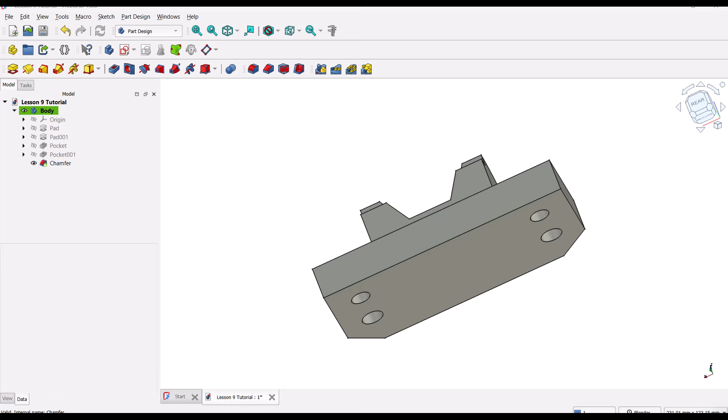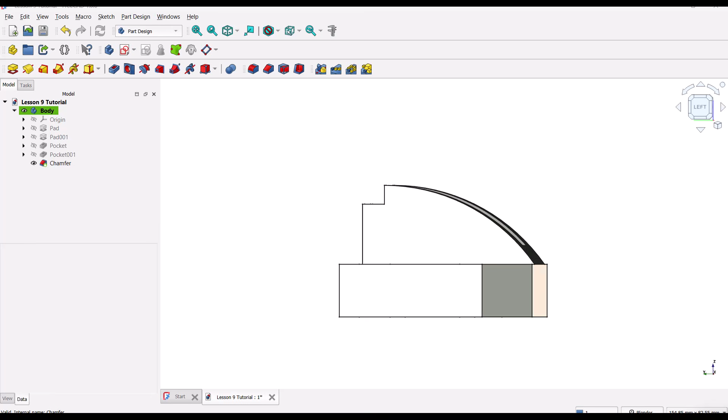In this FreeCAD beginner tutorial series, we model standard academic drawings. These are designed to help you understand how to simplify complex objects, deduce hidden dimensions, and read technical drawings. Once you finish this series, you'll be able to break down complex objects, model them easily, and troubleshoot typical FreeCAD issues.

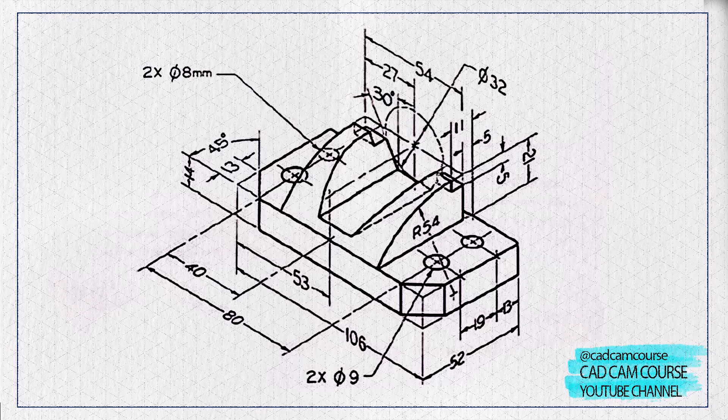In today's FreeCAD beginner video, we'll model this part called the locating finger using the Part Design Workbench. This is one of the most important parts in academic CAD training. It helps you learn the basics of 3D modeling and, more importantly, how to deduce hidden dimensions from an isometric drawing. I'll be using this reference drawing to grab all the dimensions for this object.

If you have followed my previous videos, you will know that first we will break down the complex solid into simple and easy steps. In this video, I've broken this process into 5 easy steps, and I'll also include a follow-along PDF in the description if you'd like to download it.

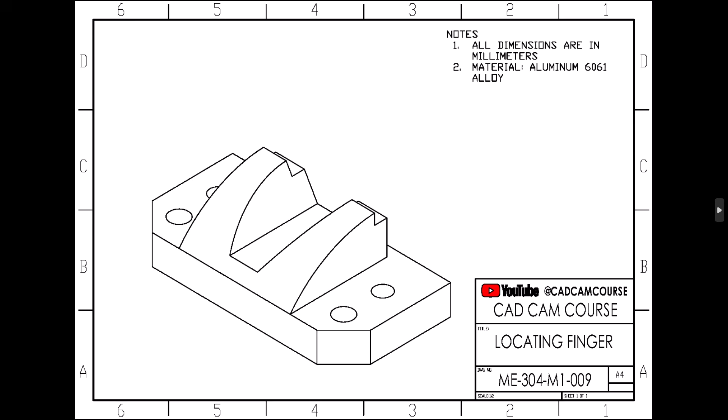Now pause for a moment and look at the isometric drawing. You'll notice it looks like 2 independent blocks joined together. Let's split them visually. We'll use reverse engineering methodology here.

Remove the features layer by layer till you approach the core geometry. Start by removing the final features like chamfers and fillets, and remove secondary features like the holes in the bottom block and the slot on the top block.

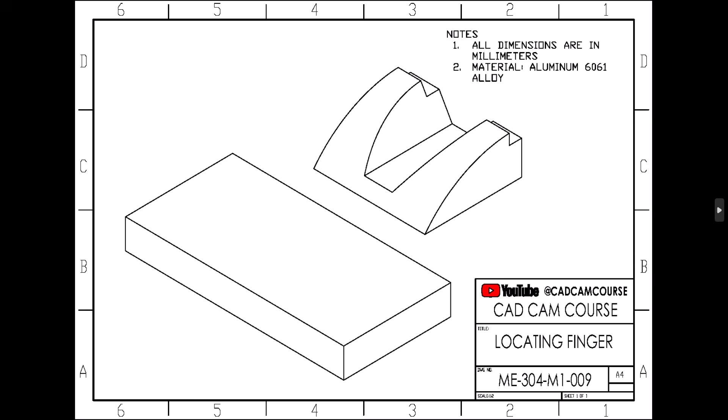Now we are left with the plain large blocks. We can notice that these are made by extruding the side profiles along the length. And finally, remove the main additive features like extrusion or revolve.

Now we're left with 2 base profiles. These are just simple sketches you can draw with basic sketching knowledge. Now let's visualize these steps as a 3D model.

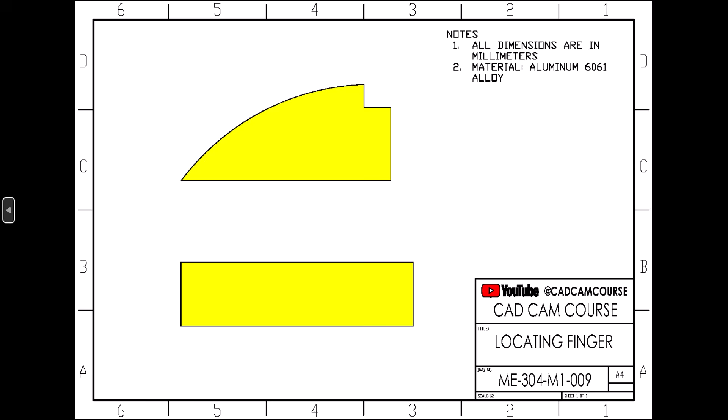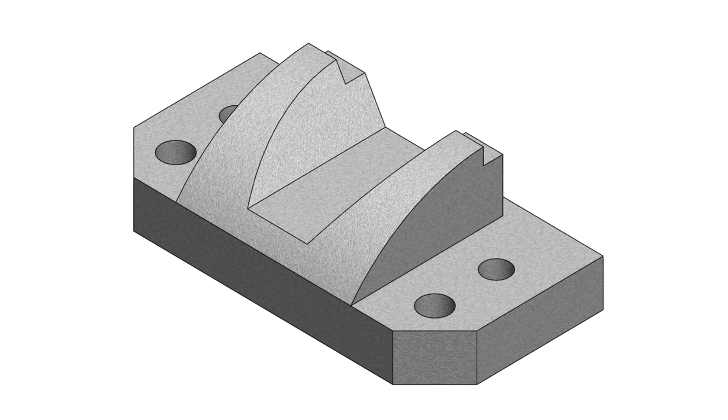Before we move ahead, I encourage you to pause the video right here and try modeling this part on your own using the basics you've learned from the previous tutorials, plus the breakdown and reverse engineering steps I've shown in this video so far. It's totally okay if you get stuck - you can always come back and follow along with me step by step. All right, pause the video now and give it a try.

All right, let's begin with step 1, creating the base plate. According to our drawing, it's a rectangle of 106 by 52 millimeters. In FreeCAD, switch to the Part Design Workbench and click on Create New Sketch.

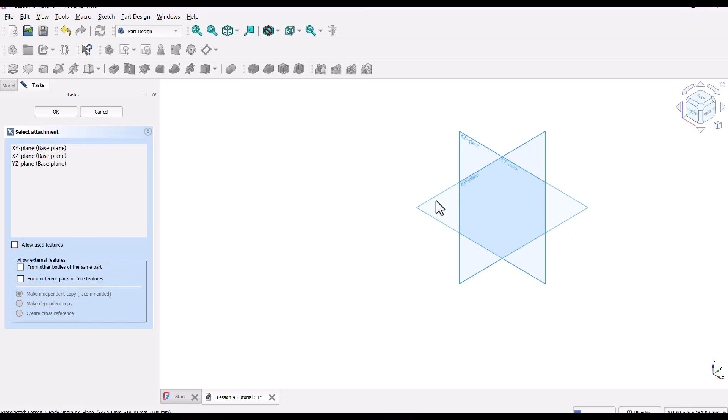FreeCAD will now ask you to choose a sketch plane. Go ahead and select the top plane, also called the XY plane. Next, click the small arrow next to the rectangle tool and choose Center Rectangle. This version of the rectangle tool helps us draw the shape symmetrically around the center point.

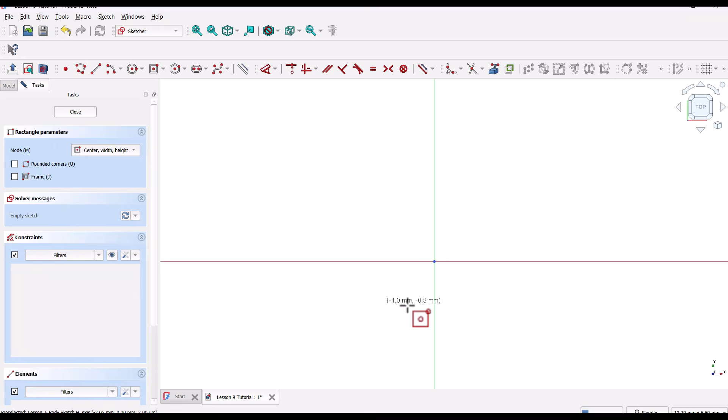Now click on the origin point and drag outwards to draw a rough rectangle. Once you're done, right-click anywhere on the canvas to cancel the tool. Now let's add dimensions and constraints to this rectangle.

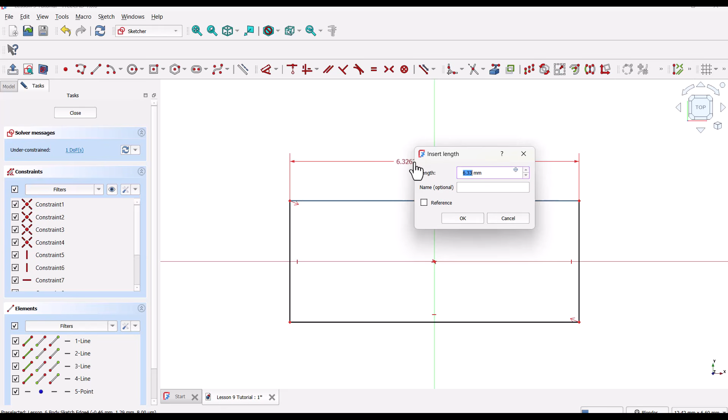Click the Dimension tool, then click on the horizontal line and set its length to 106 millimeters based on our drawing. Press Enter to confirm. If your sketch isn't fully visible, you can zoom out by scrolling down, or hit the Fit All button, or use the shortcut keys V F.

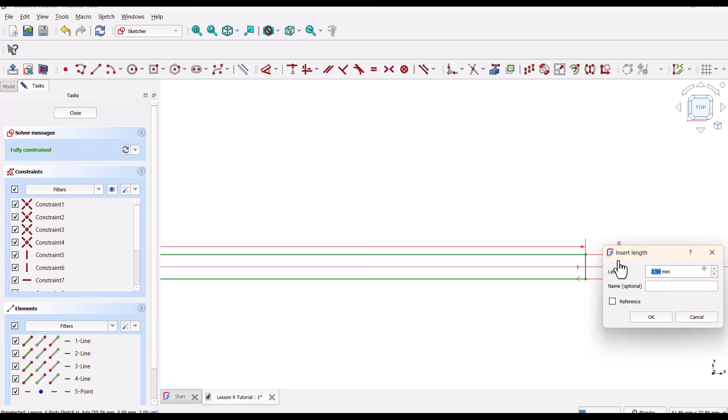Now with the Dimension tool still active, click on the vertical line and enter 52 millimeters for the height. Press Enter. Again, use V F to fit the sketch into view if needed. Once the rectangle turns green, it means it's fully constrained, which is perfect. Go ahead and close the sketch.

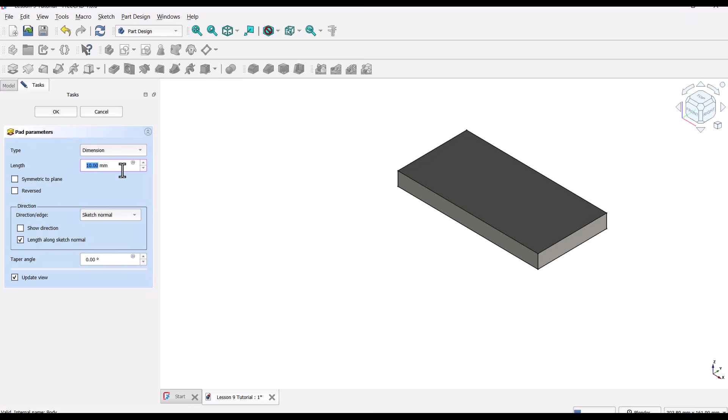Now with the sketch still selected, click on the Pad tool. This will extrude the base plate. Set the extrusion length to 14 millimeters as per the drawing. If the extrusion direction looks correct, just click OK to confirm the operation. And that's it, step 1 is complete.

Now let's move on to step 2, adding that curved block on top of the base plate. Looking at the drawing, we can see that the block is symmetrical around the midplane. You can confirm this from the dimensions - the total width is 106 millimeters, and the block sits centered at 53 millimeters on either side. So here's the plan: we'll sketch the curved profile on the midplane and then extrude it symmetrically.

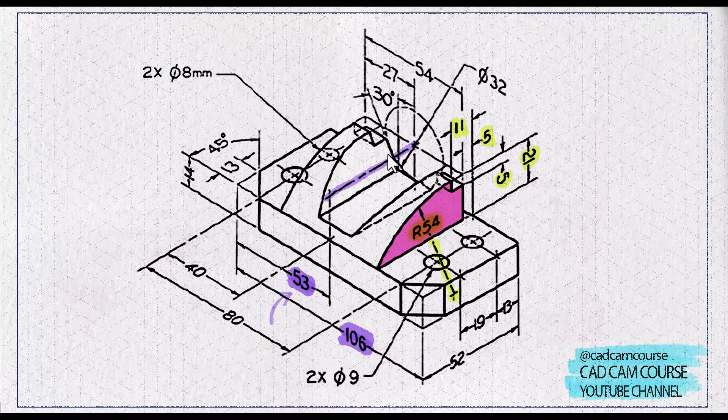In FreeCAD, click on Create New Sketch, and from the three planes, select the YZ plane, the midplane. Now let's draw the profile. But first, we need to reference the top edge of the base plate.

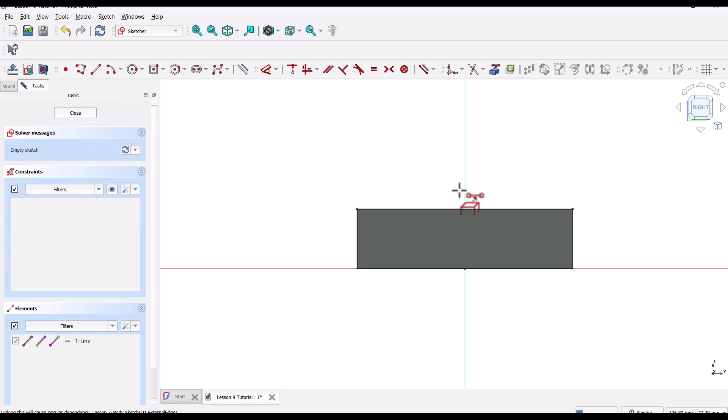To do that, select the external geometry tool and click on the top edge of the base plate. You'll see it appear as a purple line in the sketch. This gives us an anchor. Once that's done, right-click to cancel the external geometry tool and then grab the polyline tool.

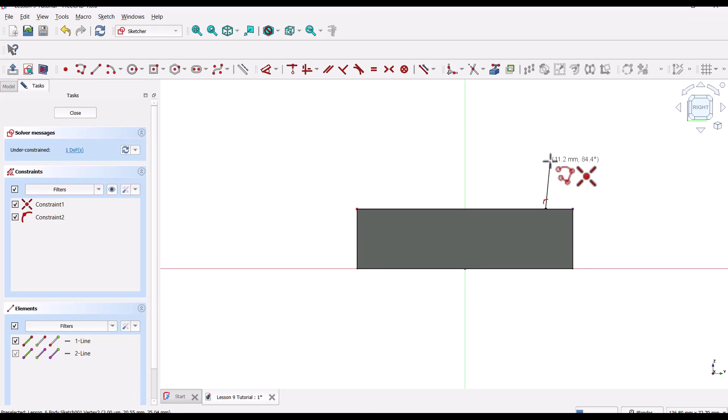Start from the top left corner of the purple line and draw a horizontal line, but stop before reaching the other side. Now draw a vertical line and then another horizontal line going inward. Make sure your lines are properly horizontal and vertical. Look for those little symbols next to the cursor.

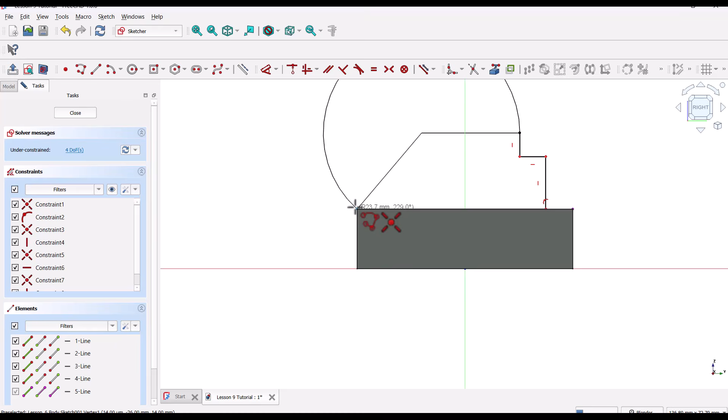Now to draw the curve, press the M key once, twice, or thrice until the tool switches to arc mode. You want a perpendicular arc that connects smoothly to the previous line. Close the shape by clicking back on the starting point. Now you've got a rough, closed profile.

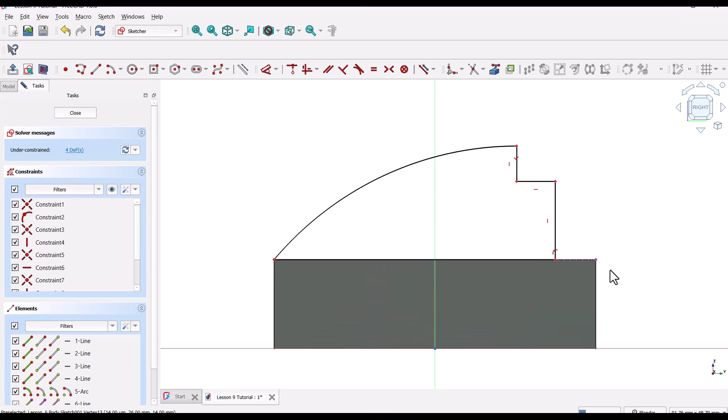Time to add dimensions. To get a better view of the sketch, click on the View Section tool. This will temporarily cut the front portion of the model so we can see clearly. Next, click on the Dimension tool to constrain the profile. Let's start with horizontal dimensions.

Click on the bottom right corner point of the profile, then on the right edge, and set the distance to 5 millimeters. Now click on the same corner point and the bottom edge and enter 11 millimeters. Add the remaining vertical and arc dimensions according to the drawing.

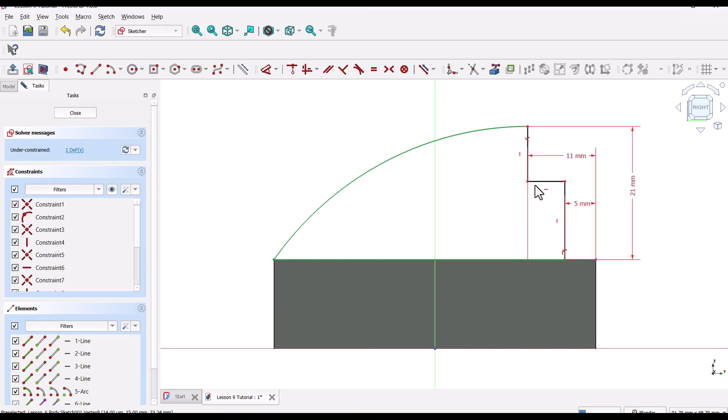Once the sketch turns green, it means it's fully constrained. Great, go ahead and close the sketch.

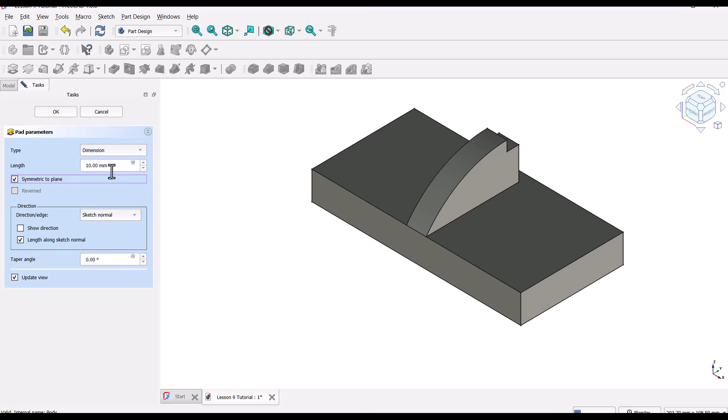Now we need to extrude this curved profile. From the drawing, the thickness of this block is 54 millimeters in total. Click on the Pad tool, and in the Pad Parameters window, make sure to check Symmetric to Plane. Set the length to 54 millimeters and click OK. And there you go, Step 2 is complete.

All right, now that all the additive features are done, let's move on to the subtractive features, where we cut shapes out of the model. In step 3, we'll be creating the slot on the top curved portion.

This is probably the most important step of the model, because it involves deducing the dimensions of the slot from the given technical drawing. So before we jump in, I encourage you to pause the video for a moment and try to figure out the dimensions of this slot using the drawing.

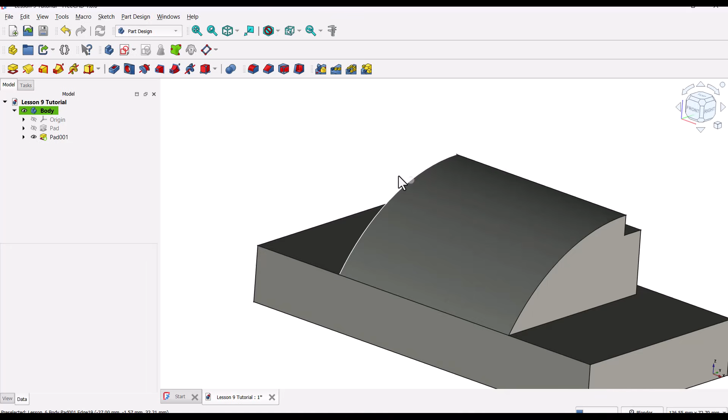If you take a look at the isometric drawing, you'll notice that the slot on the curved block is trapezoidal in shape. So we'll sketch this slot on the back face of the curved block. First, rotate the model to the back side, click on the back face, and then hit the Create New Sketch button.

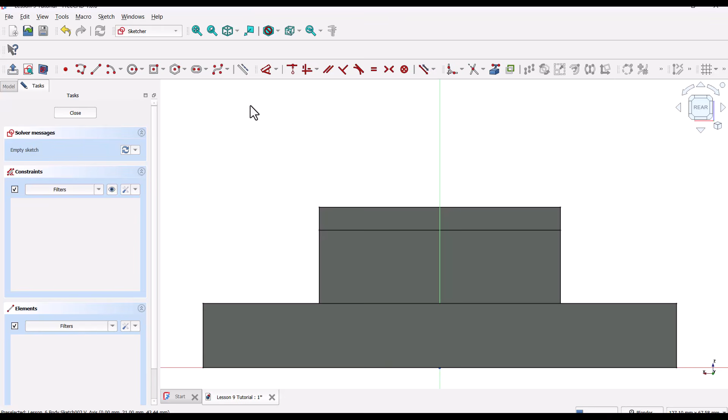Now from the drawing, we can see that this slot is defined by a circle and an angle. Let's use those clues to recreate the shape. First, grab the Circle tool and draw a rough circle with its center point placed on the vertical axis plus the midline. Now we need to constrain the circle properly.

From the drawing, the center of the circle is 21 millimeters above the top surface of the base plate. To reference that top line, grab the external geometry tool and click on the top edge of the base plate. It'll turn purple. Now grab the Dimension tool, click on the center of the circle and the purple line, and enter 21 millimeters. Next, set the diameter of the circle to 32 millimeters.

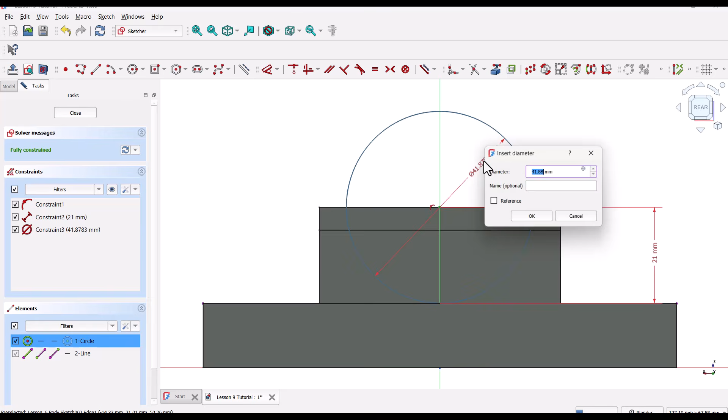At this point, the circle is fully constrained, but this circle is just for reference. So right-click on the circle's edge and choose Toggle Construction Geometry. This turns it into a dashed construction line.

Next, let's draw the trapezoid. Grab the polyline tool and draw a rough trapezium, something like this.

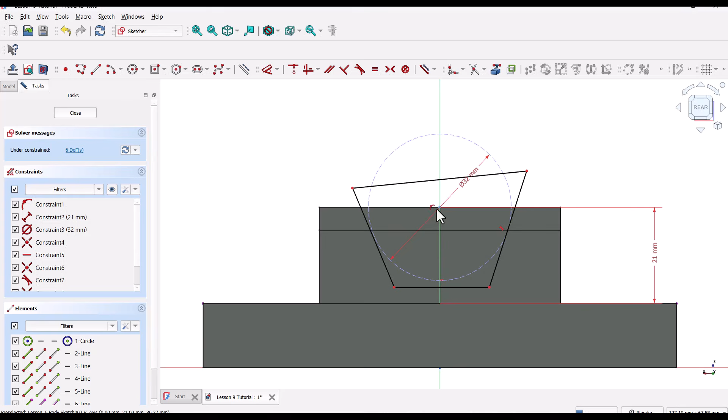Now let's apply constraints. If you look at the drawing, the bottom line and two inclined sides are tangent to the circle. So hold Control, select the bottom line and the circle, then click on the Tangent Constraint tool. Do the same for each of the inclined lines, select one side and the circle and apply Tangent Constraint.

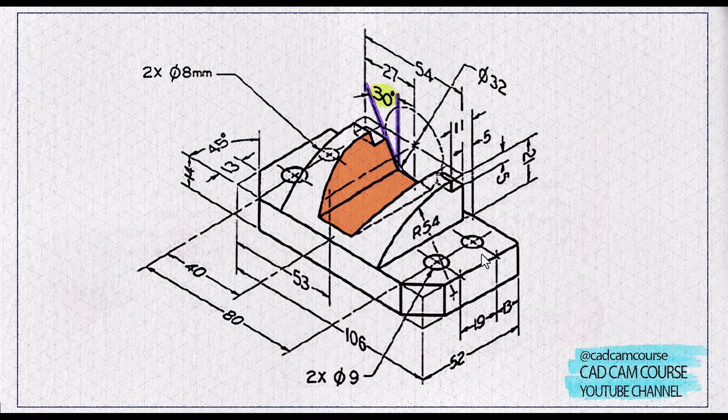Now the sketch still isn't fully constrained. Let's fix that. The drawing tells us the sides of the trapezium are inclined at 30 degrees to the vertical axis. So grab the dimension tool, click on one of the inclined lines and the vertical axis, and set the angle to 30 degrees.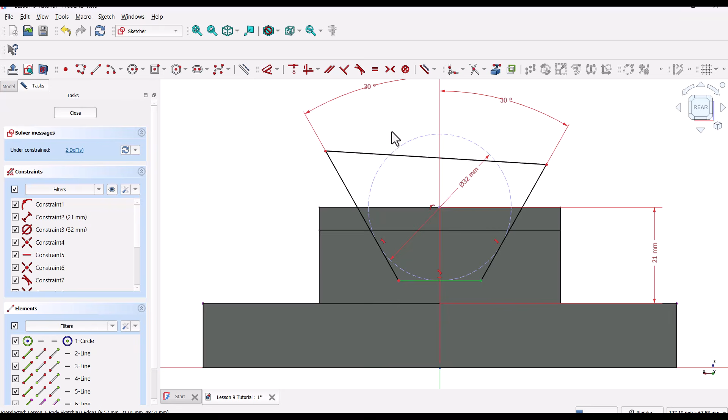This trapezium is also symmetrical around the vertical axis, so we can simply apply the same 30-degree angle on the other side by again selecting the second inclined line. Lastly, select the top line of the trapezium and make sure it's horizontal.

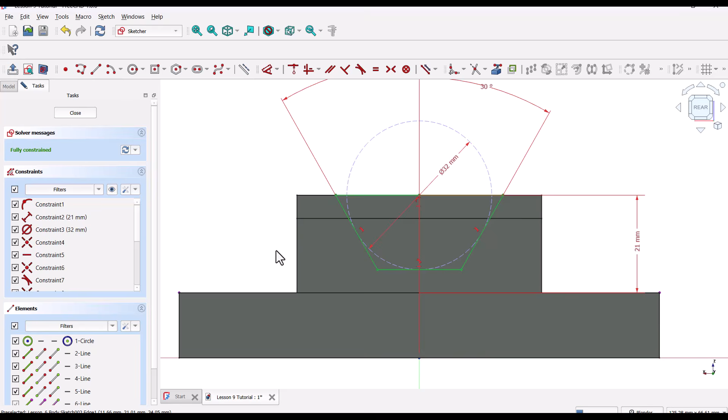Then hold Control, select the top line and the center of the circle, and click on the Coincident Constraint tool. The sketch just turned green, which means it's fully constrained. Now close the sketch. With the sketch selected, click on the Pocket tool to cut out the slot.

Since this slot goes all the way through the part, in the pocket parameters, set the type to Through All, and click OK. And just like that, step 3 is now complete.

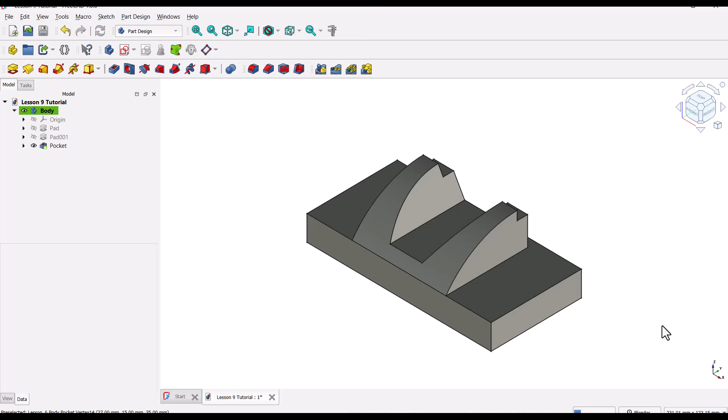All right, moving on to step 4, let's create these 4 holes on the top face of the base plate. First, go back to FreeCAD, select the top face, and click on the Create New Sketch tool.

We'll begin by drawing 2 rough circles on one side of the rectangle. Don't worry about the exact size or position for now, just place them roughly, then right-click anywhere on the canvas to cancel the circle tool.

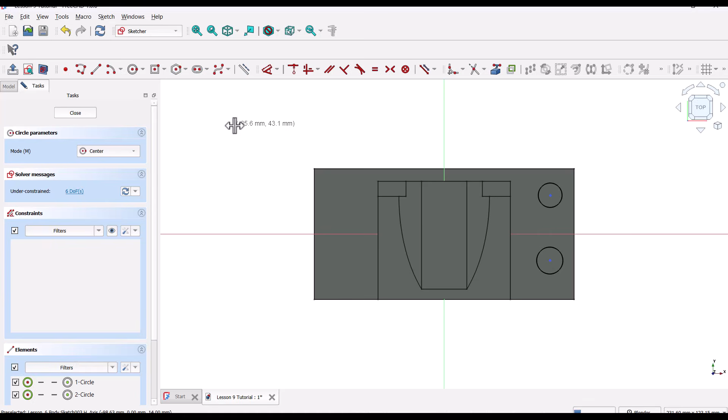Now let's start constraining the sketch. From the isometric drawing, we can see that these 2 circles lie on a vertical line. So hold down Control, click on the centers of both circles, and apply the vertical constraint.

Now grab the Dimension tool, select both circles, and set the distance between them as 19 millimeters. Next, grab the External Geometry tool and select this horizontal edge of the base plate to use it as a reference. Now, again using the Dimension tool, set the distance as 13 millimeters.

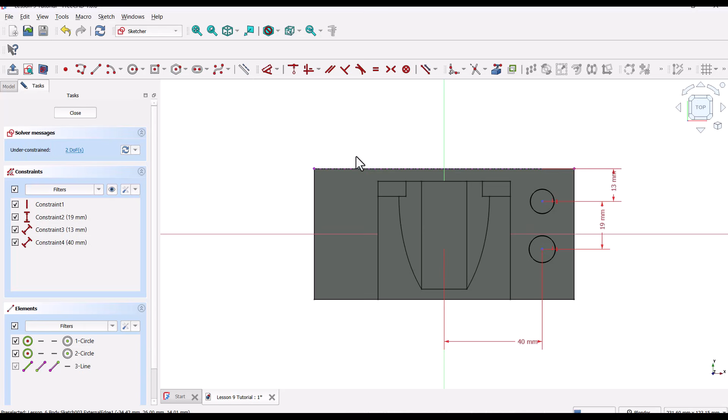Great, now let's define the diameters of these circles. From the drawing, we know one is 8 millimeters in diameter and the other is 9 millimeters. So click on the lower circle and set the diameter as 9mm. Then select the upper circle and set its diameter as 8mm.

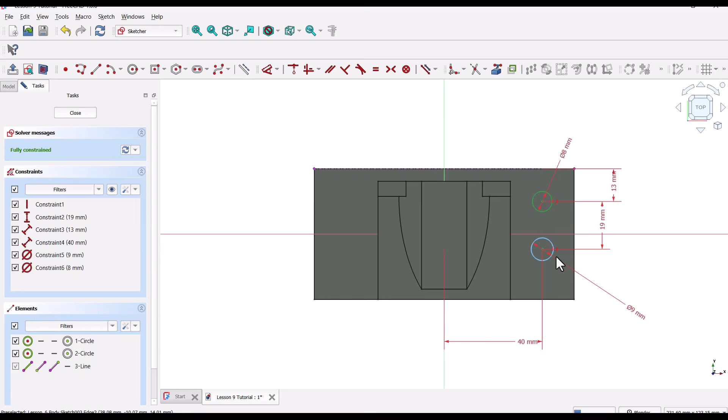Perfect so far? Now here's the trick. The other 2 holes on the opposite side are symmetrically placed, so let's mirror these 2 circles across the y-axis. Hold Control, select both circles, and then click on the Symmetry or Mirror tool.

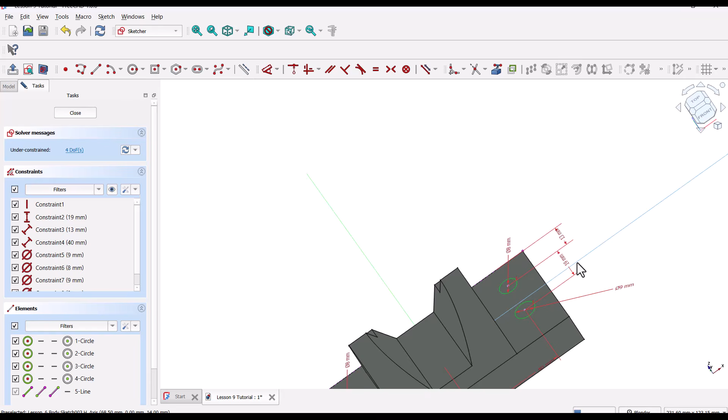Now select the y-axis as the axis of symmetry, and just like that, the other 2 circles appear on the opposite side. The sketch turns green, which means it's fully constrained.

Now close the sketch. With the sketch selected, click on the Pocket tool to cut out the holes. In the pocket parameters, set the type to Through All and click OK. Done. Step 4 is now complete.

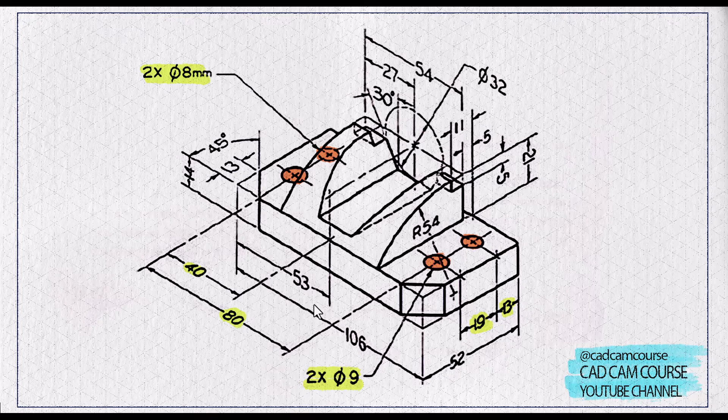Now for step 5, we'll add chamfers to these 2 outer corners. In the drawing, the chamfer is defined using 2 parameters: a distance of 13 millimeters and an angle of 45 degrees. Let's do that now.

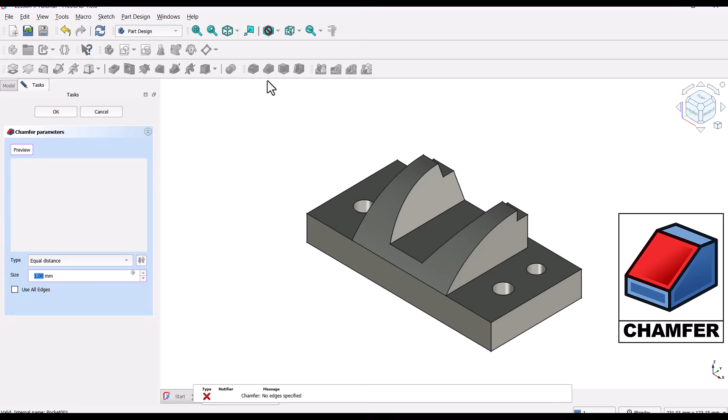Back in FreeCAD, click on the chamfer tool. In the chamfer parameters window, change the type to distance and angle. Set the distance to 13 mm and the angle to 45 degrees.

Then click the Select button and pick the 2 outer corner edges of the base plate. Once both edges are selected, click OK. Step 5 is done, and with that, the entire model is now complete.

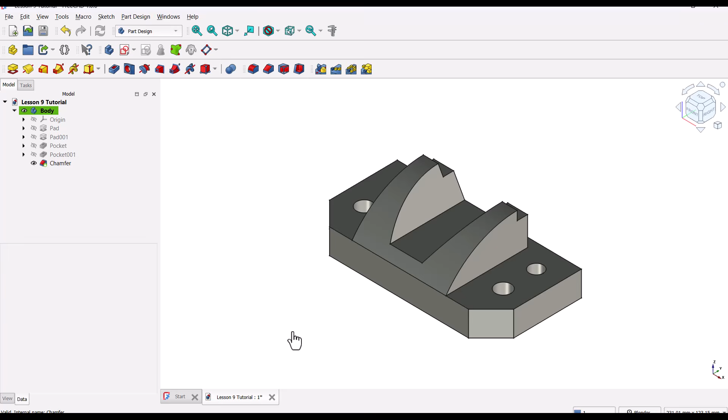Awesome job. And that's it. We've successfully modeled the locating fingers step by step using FreeCAD's Part Design Workbench. If you followed along till the end, amazing work.